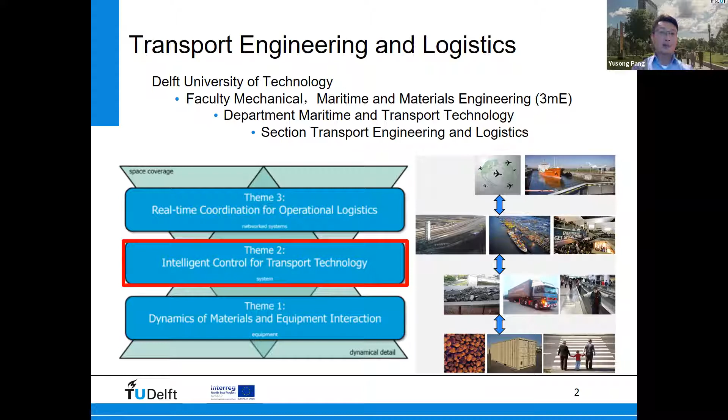The second research theme is intelligent control for transport technology. That means we want to control transport at a system level instead of equipment level by means of artificial intelligence. Then the highest level is research regarding real-time coordination for logistics, meaning the control concerns large-scale transport systems and logistic processes. At this moment, I'm mainly in charge of the second research theme, regarding intelligent control for transport systems.

So I would like to quickly introduce the AVATAR project, which is ongoing within our research section. AVATAR stands for Autonomous Vessel, Cost-effective Transshipment and Waste Return. Basically, the goal is to solve the last mile freight distribution problems by means of the transition from road transport to water transport, to achieve sustainable urban transport.

I just mentioned a few motivations of this project. For most European countries or cities, there is a large-scale waterway network, and originally those waterway networks were built for cargo transport. But nowadays we are facing more and more challenges for last mile distribution of freight. At this moment, the conventional waterway is underutilized, and specifically lots of freight transport is done by road transport, by trucks. Then we face lots of traffic jams, road congestion, and also increasing competition for urban space.

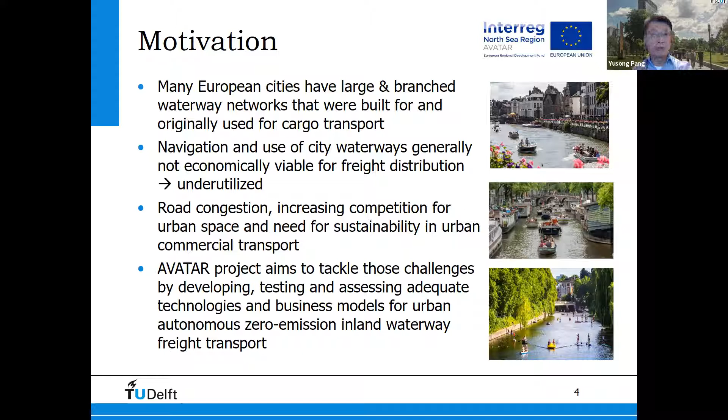This project is a European Interreg project aimed at the North Sea region, and it's a co-financed project. The main aim of the project is to develop several aspects regarding the prototype of the autonomous ships, and also to realize remote monitoring and control of the autonomous ships, then to develop business cases and use cases in urban environments.

Regarding the business case, we will analyze the political and legal framework to apply the ship units in the regions, including Ghent, Leuven, Delft, and Hamburg, across those 3 countries. The most important stage is the final phase of this project, where we are going to perform pilot tests in those regions.

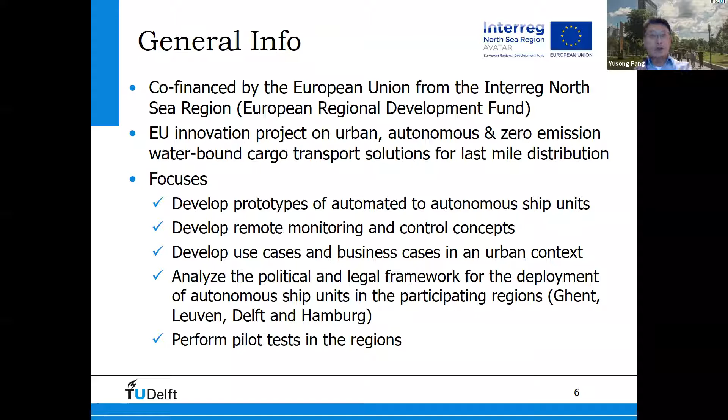If we think about the future of this project regarding the testing, operation, and assessment of the autonomous ships, we can distinguish the whole process into 3 steps. The first one is to develop the pilot scale autonomous ship, then to run it on site. So far, the University of Leuven has already developed one.

A semi full-scale 1-ton vessel has already been implemented in the area of Leuven. Based on this 1-ton pilot scale vessel, we are testing different monitoring systems, different sensor technology, and onboard computer and control systems by means of intelligent control.

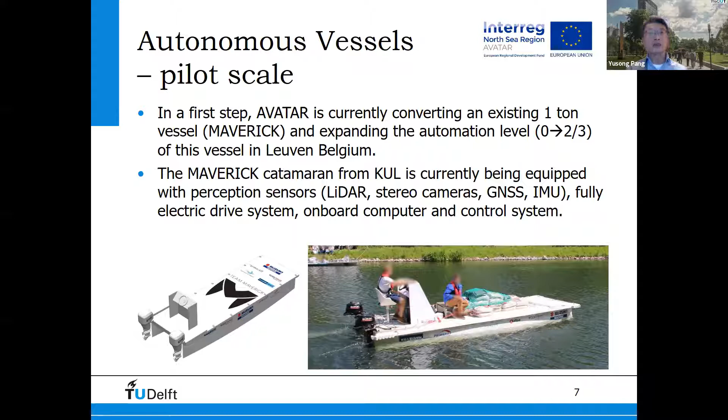Then for the full scale, that's the ongoing step at this moment. We are building the new vessel with a capacity of 20 tons, and since October, the main body of the ship has started to be built in the shipyard in the Netherlands.

And afterwards, the hull of the ship will be transported to Ghent and integrated with the fully electric drive system to realize the zero-emission vessel. Later on, for the testing and operation, the experience and technology tested by the company Seafar, based on the Maverick vessel, will be implemented on this full-scale vessel.

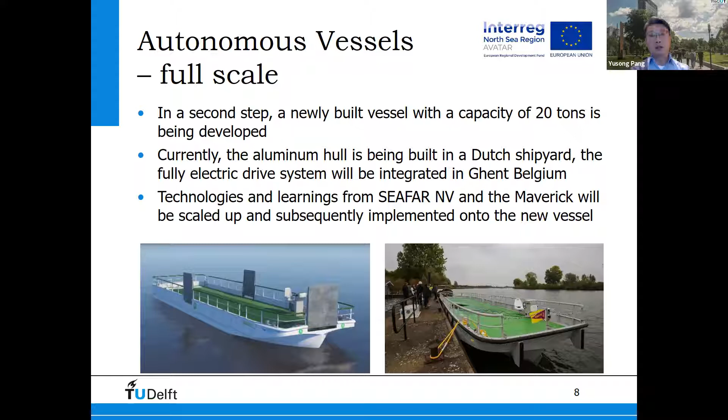But actually, so far, we just see the application or implementation for individual vessels. If we think about the real application, we will face multiple autonomous ships in the urban transport environment. That's also the reason we, as Delft University, are working on research of monitoring and control of multiple autonomous ships.

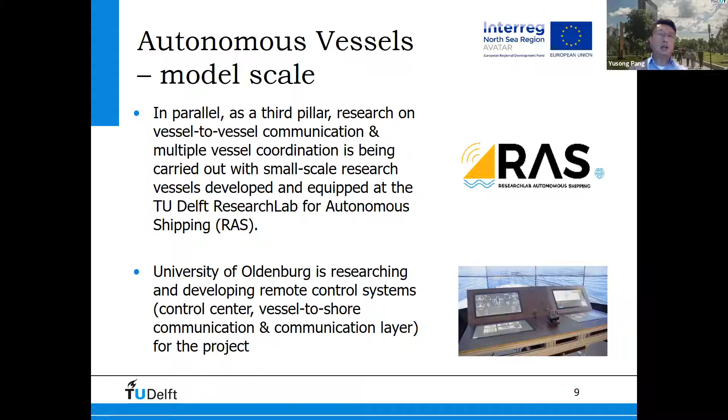At this moment, we have the research lab of autonomous shipping with a fleet of model scale vessels, which are used to test and implement the fleet of ships. Together with the University of Oldenburg in Germany, we are building the remote monitoring and control and data communication system regarding the interaction between vessels and between vessel and shore sites to realize the project.

As I'm from Delft University of Technology, following, I would like to give you a quick view about our main research of the RAS lab, the research lab of autonomous shipping, and show you some current development and experiments we have already done. Basically, the RAS lab aims at the research, development, and realization of autonomous shipping in the urban, not only for urban transport but also for maritime transport.

But the project Avatar aims at urban inland transport. Besides this research and development, the most important thing for us is the application site we can use to test autonomous shipping and also to do experiments regarding the monitoring, communication, and control of the overall system in diverse environments. So here's the overview of our existing lab facilities.

We have the laboratory of autonomous shipping, we have the flume tank and also the towing tank. The towing tank contains two parts: the bigger part, with a total length of 50 meters, and the smaller one with a length of 20 meters. And on the right bottom side, you see the Green Village.

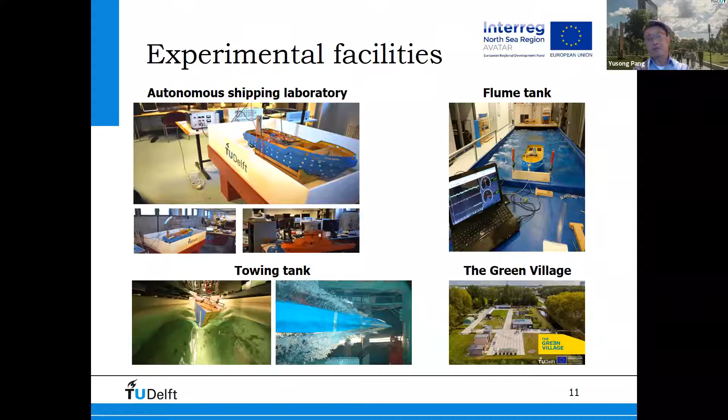That's one part within our campus, and this Green Village is surrounded by a canal. Based on this site, we can run our autonomous ships in the canal, with remote control located in the village. For the ships, so far we have already developed 3 generations of model scale autonomous ships.

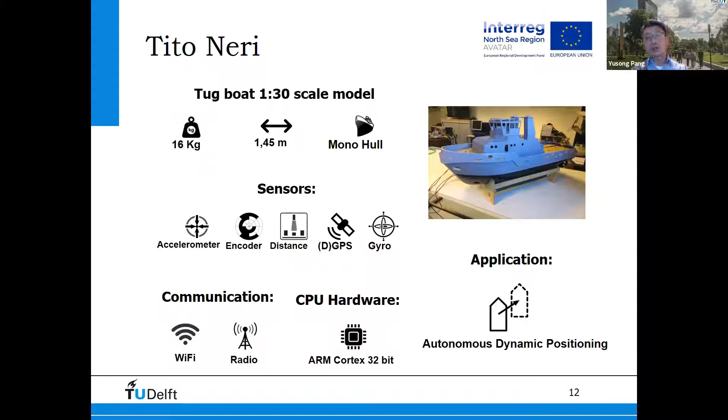The first generation is the tugboat, with a length of almost 1.5 meters, equipped with different types of sensors. The communication between the ship and the control center is realized by Wi-Fi and also radio frequency. Mainly this tugboat was used to test the control regarding autonomous dynamic positioning.

Then the second generation is the gray Seabax, a 1:30 scale offshore ship. More or less, the configuration of the ship is similar to the tugboat, but we added a camera as an extra monitoring facility, and also more intelligent control system to realize the remote control for the ship.

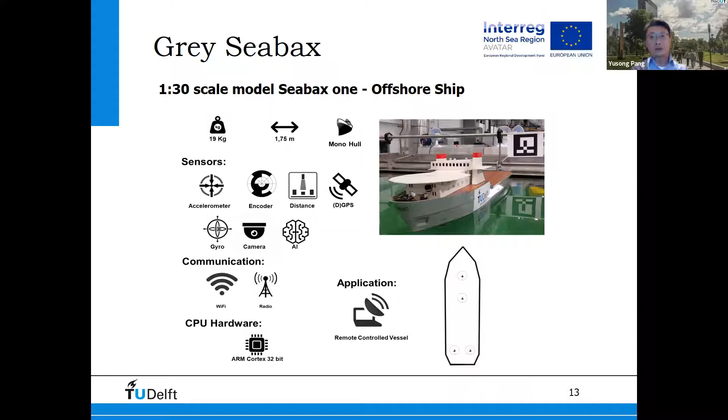Then the third generation is a fleet of model scale ships. At this moment, we have a fleet containing 20 individual ships, which we use for testing the distributed control for multiple vessels.

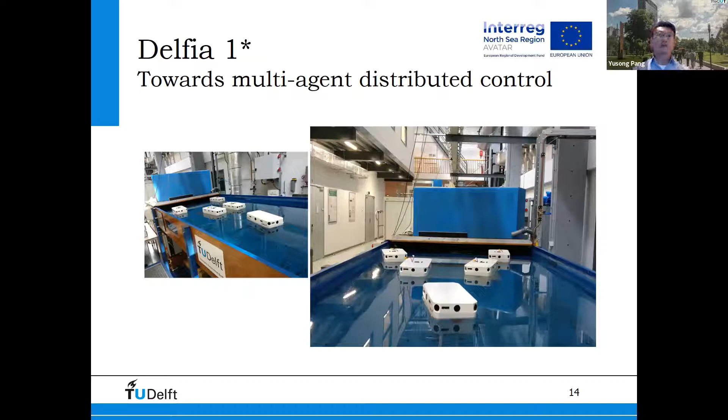So here we have the overview of the current research in the RAS lab. Based on the lab facility and development, we are realizing the control for both individual ship and multiple ships regarding the monitoring, communication, and coordination of the ship. Besides the control of ships, we also take the surrounding transport and logistic process into account.

And based on the interaction between the human and the machine, and also development of the middleware of the control system, as I mentioned, the most important thing is to validate the control system and algorithms based on experiments, by taking simulation results, real-life data, and the performance of model-scale vessels into account. Just like here, we see the middleware of the overall control system.

We developed the system from data acquisition to the automatic identification of vessels for tracing and tracking, building the large-scale communication network, followed by data analysis, to achieve intelligent operational decision making.

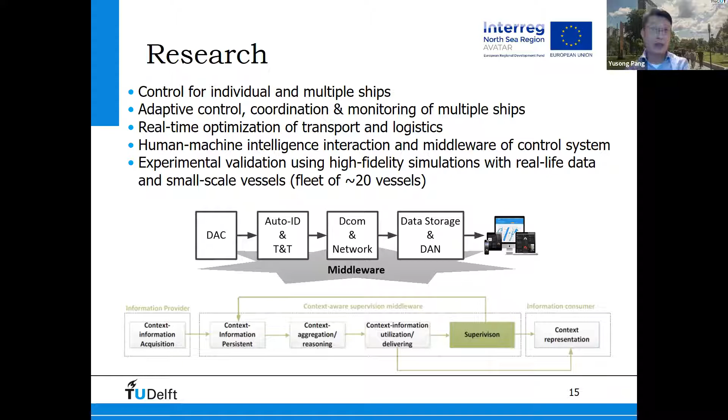So here we see one example of the control for individual ships. This part of the research is based on collaboration between University of Delft, the government of Amsterdam, and also MIT University in the United States, based on Roboat developed together.

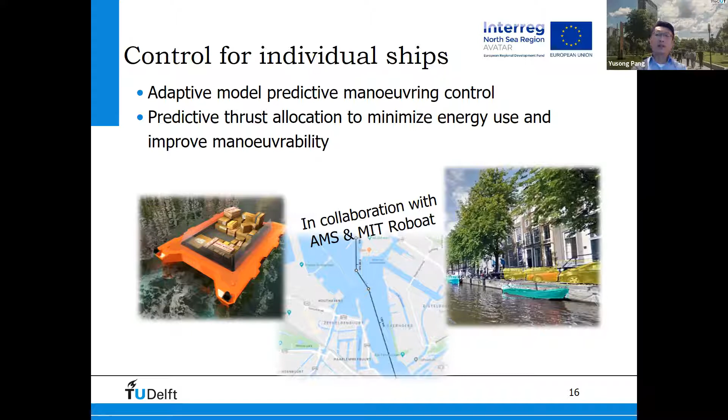For this individual ship control, we apply model predictive control to predict both the maneuvering of the ship and also the thrust allocation, taking energy consumption into account.

And here we see something about control for multiple ships. Based on cooperative control and model predictive control, we try to realize large-scale control for multiple ships within city waterway transport, and also to realize collaboration between vessels, and between vessel and infrastructure or shore sites.

Another important thing is we aim to achieve control for sailing in formation regarding energy consumption or fuel efficiency. On the right figure, we see the vessel train, or platooning of vessels, based on the leader and follower principle, to improve or optimize the control of the fleet of autonomous ships.

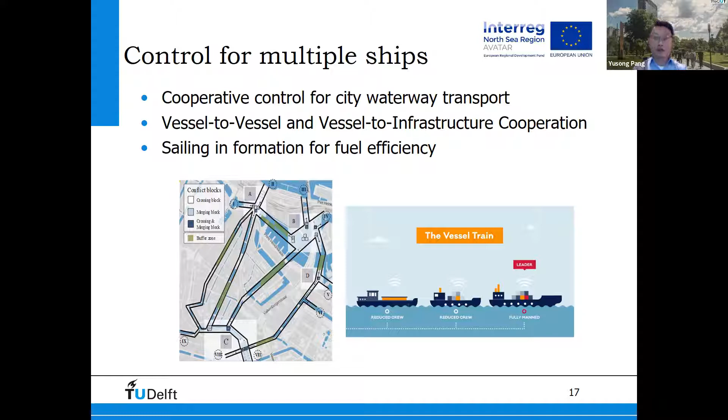To validate the control system and the model for control, we developed integration methods in different operational scenarios and operating environments, taking autonomous shipping operation, human controlled operation, and simulation and model outputs for the experiment and validation of the control system. If necessary, we also take regulations or rules of waterway transport into account.

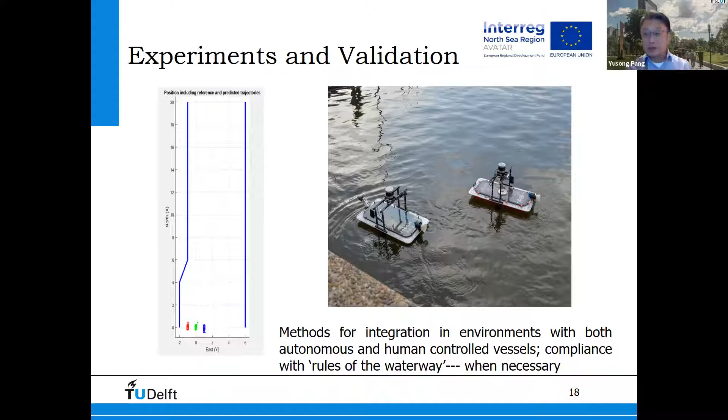At the end of my presentation, I would like to show you three typical applications and experiments we have done based on the research of the RAS lab at Delft.

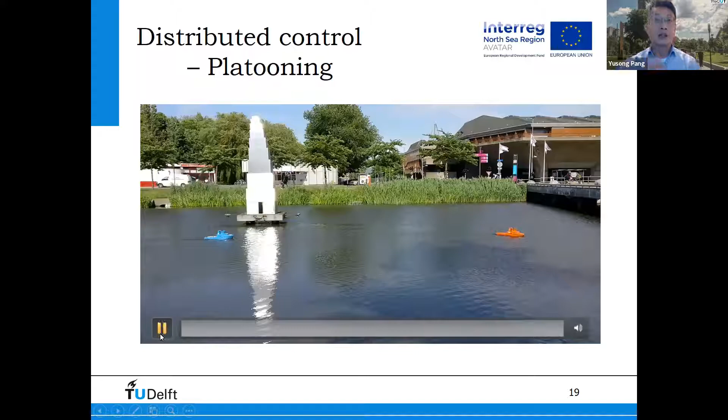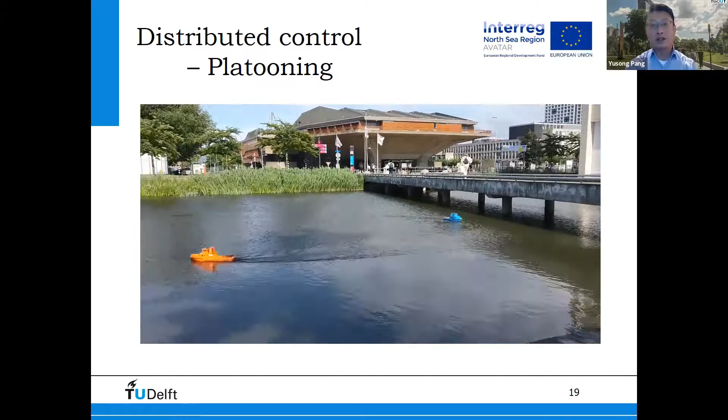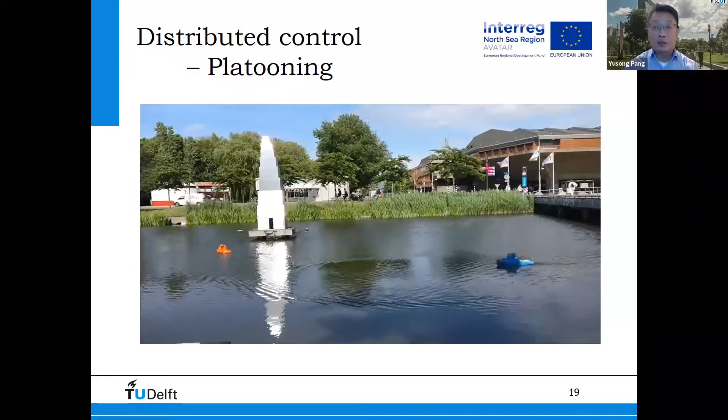Here we see the application of platooning of fleets, or the leader and follower control principle, to control multiple ships distributed in the scale of waterway transport. Based on this control principle, we build communication between the leader and the follower, and the collaboration between the two vessels is realized.

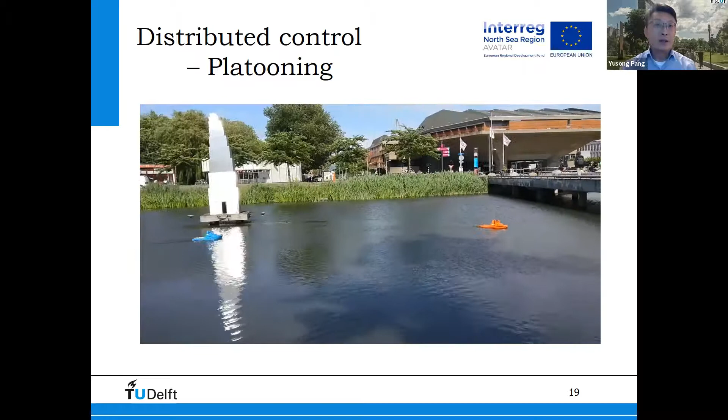The second application: I show you simulation results based on decentralized control of multiple autonomous ships. The control system takes path planning, navigation trajectory, and collision avoidance into account. Besides this simulation output, the control system was also validated and realized in the Green Village I mentioned earlier, with multiple ships.

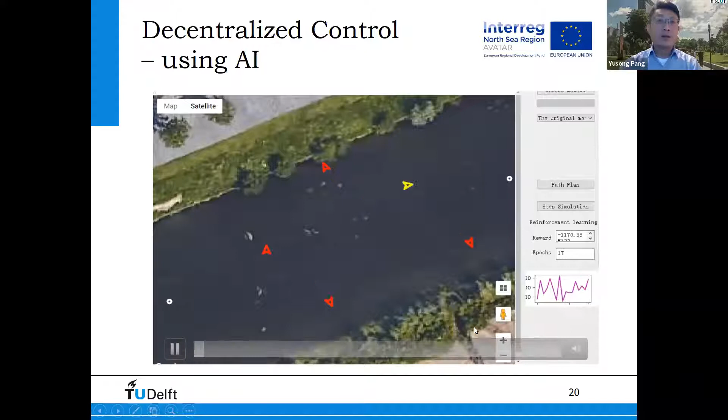The third application is the formation of ships as a fleet. I would like to show you the part of the research regarding the assembly of multiple ships, and also the unique or consistent performance of multiple ships based on the hybrid control system.

Okay, so it's almost time. Due to the limited time, I'm sorry I can't really introduce more about our research and the project. Hopefully we have some other chances to really exchange ideas.

Thank you very much Dr. Pang for the wonderful presentation on autonomous ships. Last year we also invited the MIT Senseable City Lab to talk about Roboat in Amsterdam, so it's very nice to see you again in the follow up.